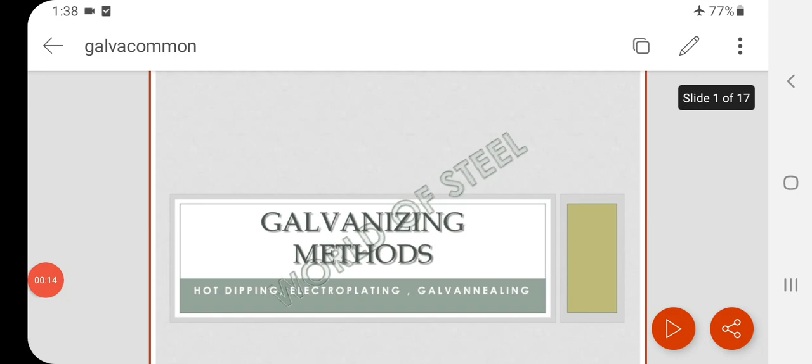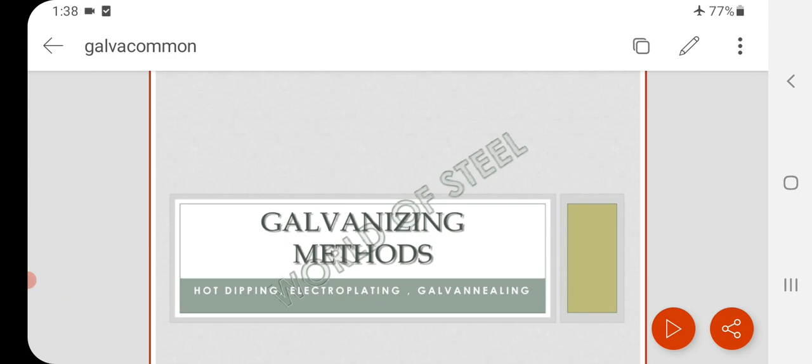Subject is Engineering Chemistry. Today's topic is galvanizing methods. These methods are used in corrosion to prevent corrosion. These are three types: hot dipping, electroplating, or galvannealing.

Galvanization is the process of applying a protective zinc coating to steel or iron in order to prevent rusting. The protection is twofold: physical protection from moisture and air, and electrochemical cathodic protection. Patina, a layer of zinc oxide salts and other compounds formed when Zn reacts with salts and moisture.

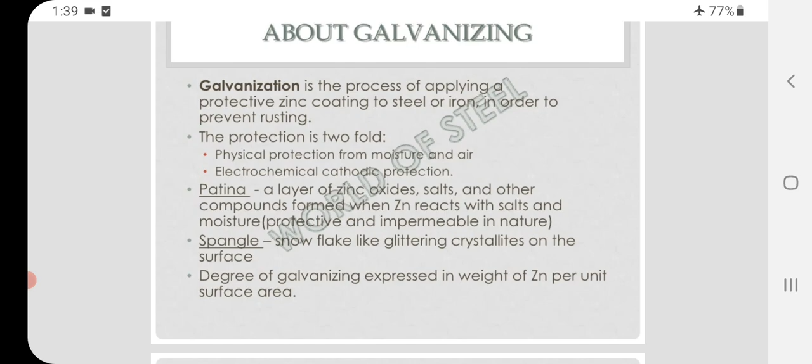Spangle, snowflake-like glittering crystallites on the surface. Degree of galvanizing is expressed in weight of Zn per unit surface area. Galvanizing methods: hot dipping in molten zinc, thick coat; continuous sheet galvanizing, thin coat, done before forging and can withstand bending and reshaping.

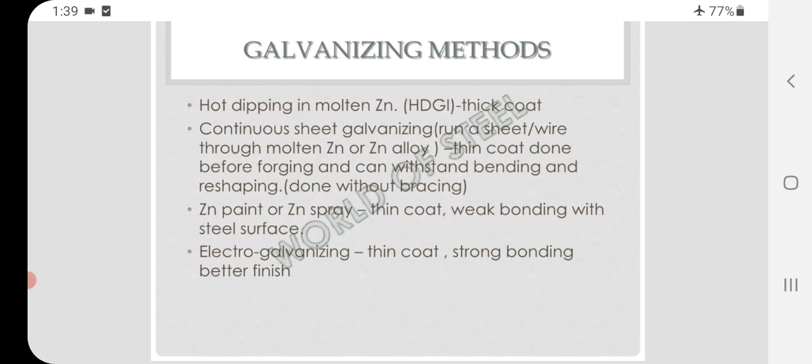Zn paint or Zn spray, thin coat, weak bonding with steel surface. Electrogalvanizing, thin coat, strong bonding and better finish. The material generally used is aluminum and silicon. Killed steel, so that no oxidation occurs during solidification.

Abrasive blasting, the process of using a forceful stream of particles available in varying hardness to remove residue and contaminants from steel surfaces to prepare for galvanizing. Caustic cleaning to remove organic impurities. Passing the metal through a molten bath of zinc at a temperature of around 460 degrees Celsius.

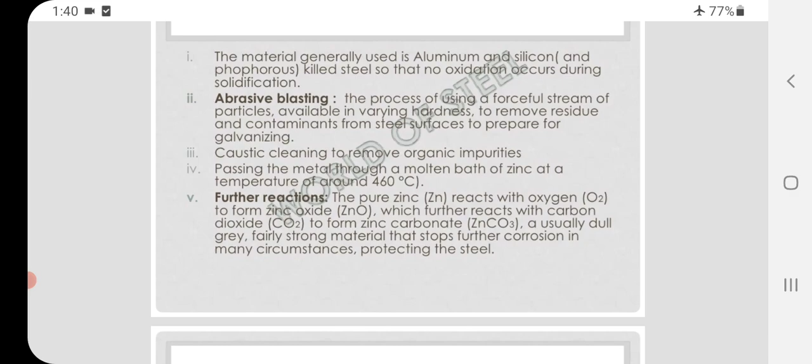Further reactions: the pure zinc reacts with oxygen to form zinc oxide, which further reacts with carbon dioxide to form zinc carbonate, a usually dull grey, fairly strong material that stops further corrosion in many circumstances, protecting the steel. In case of HR Si should be low, and in case of CRP should be low.

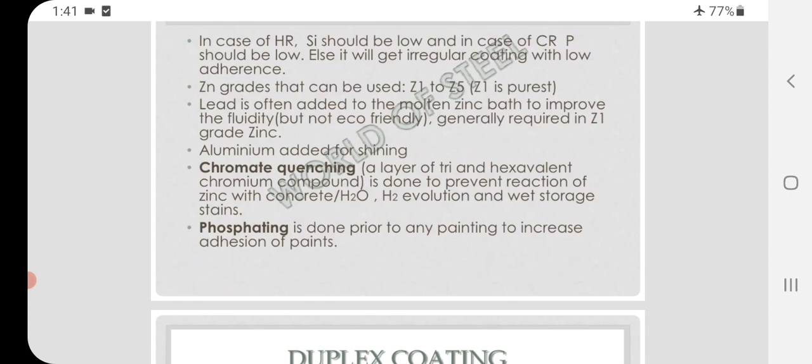Chromate quenching, a layer of a tri- and hexavalent chromium compound, is done to prevent reaction of zinc with concrete, H2O, H2 evolution and wet storage stains. Phosphating is done prior to any painting to increase adhesion of paints.

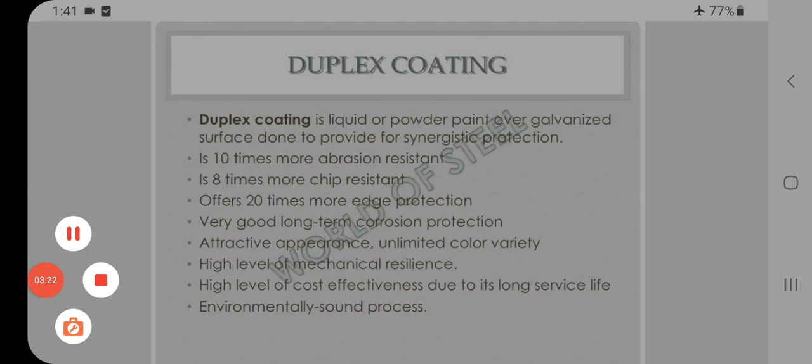Duplex coating is a liquid or powder paint over a galvanized surface, done to provide synergetic protection. It is 10 times more abrasion resistant, 8 times more chip resistant, offers 20 times more edge protection, and very good long-term corrosion protection.

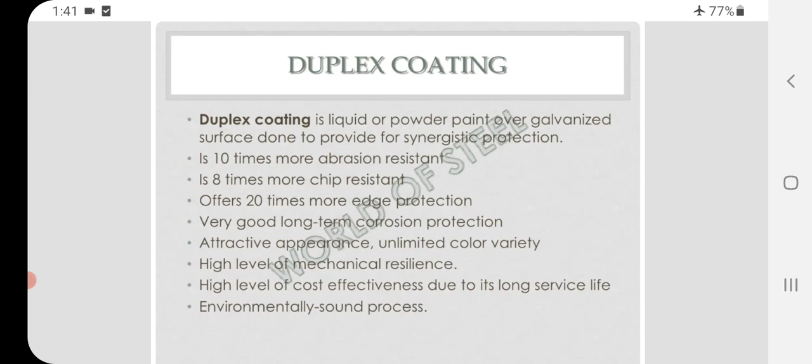Attractive appearance, unlimited color variety, high level of mechanical resilience, high level of cost effectiveness due to its long service life. Environmentally sound processes. Layers of zinc coating.

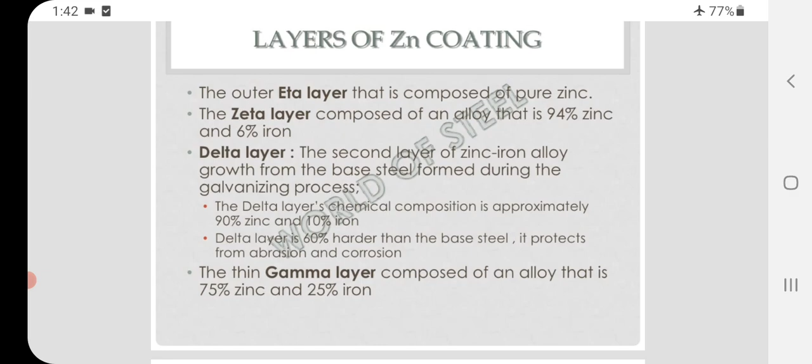The outer eta layer is composed of pure zinc. The zeta layer is composed of an alloy that is 94% zinc and 6% iron. Delta layer, the second layer of zinc-iron alloy grown from the base steel during the galvanizing process. The delta layer's chemical composition is approximately 90% zinc and 10% iron.

Delta layer is 60% harder than the base steel. It protects from abrasion and corrosion. The thin gamma layer is composed of an alloy that is 75% zinc and 25% iron.

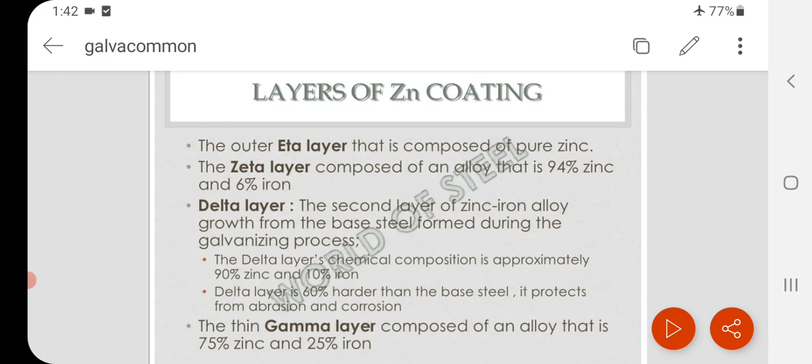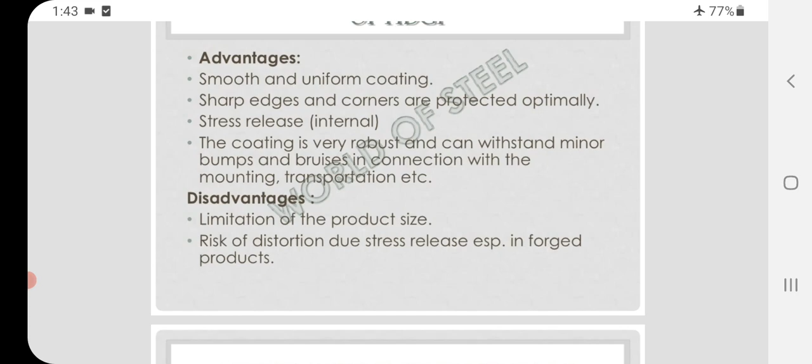Disadvantages: limitations of the product size, risk of distortion due to stress release in forged products. Applications of galvanizing: roofing and walling, safety barriers, handrails, consumer appliances, automotive body parts, metal pails in most heating and cooling duct systems in buildings.

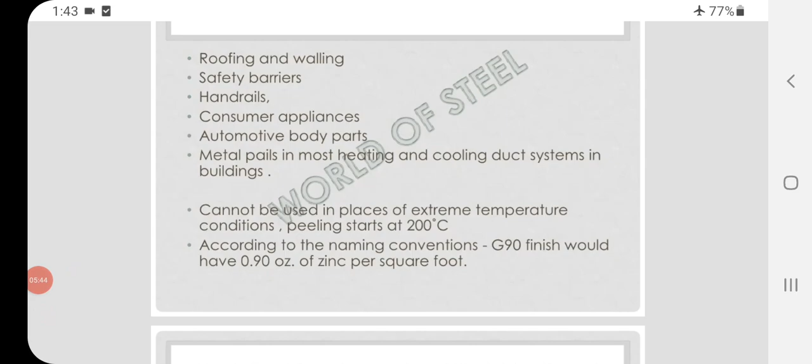It cannot be used in places of extreme temperature conditions. Peeling starts at 200 degrees Celsius. According to the naming conventions, a G90 finish would have 0.90 ounces of zinc per square foot.